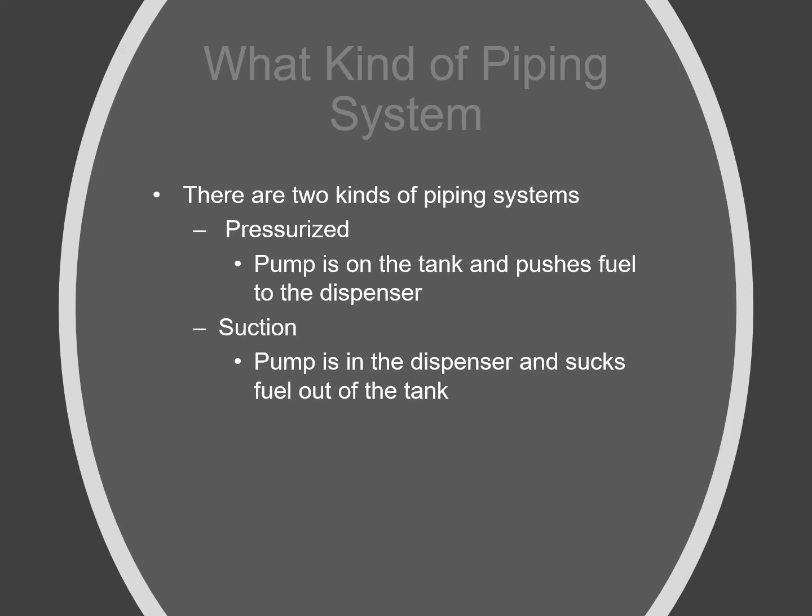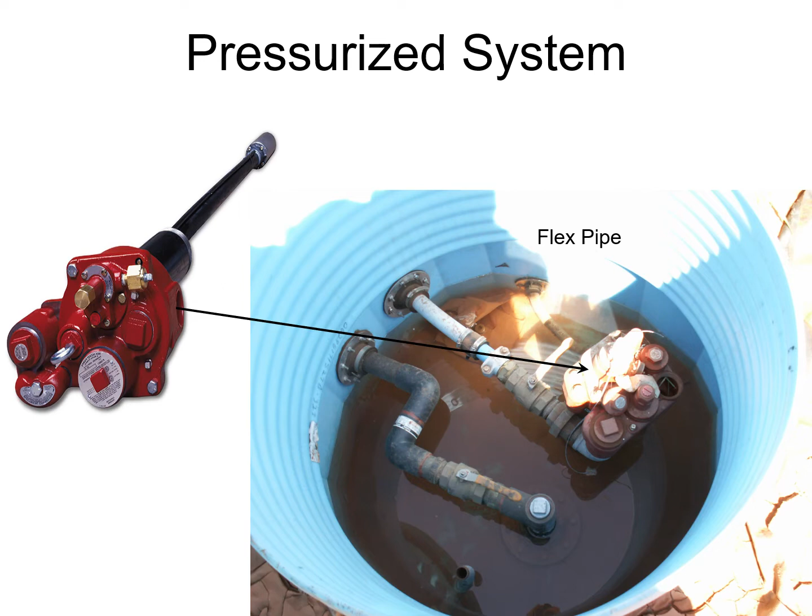That would be crazy. So what we talked about in 101 was the two types of piping systems, the pressurized and the suction system. And then when you're looking at a pressurized system, you're looking down into the sump, you can actually see the piping down there. And we'll talk about what kind of piping you see when you look in the sump in one of the other slides.

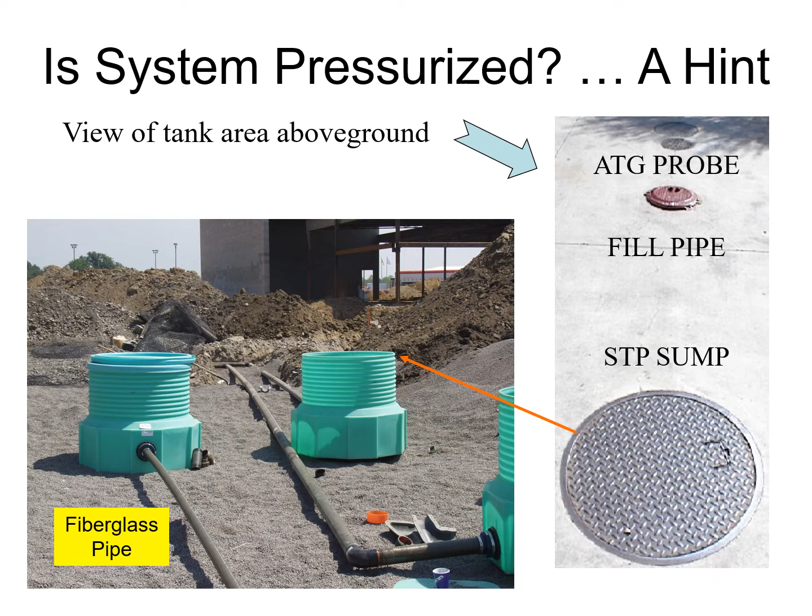Pressurized system, this is how you know it's a pressurized system. Usually you have a big STP sump, and then you can see the layout of the piping whenever they're installing the system on the ground. And these are fiberglass pipes in this system.

So piping in an underground storage tank system is very similar to the underground storage tanks. There's a primary pipe. In a single wall pipe, that's all you have is primary piping. That's it. So if there's a release, it goes straight to the environment.

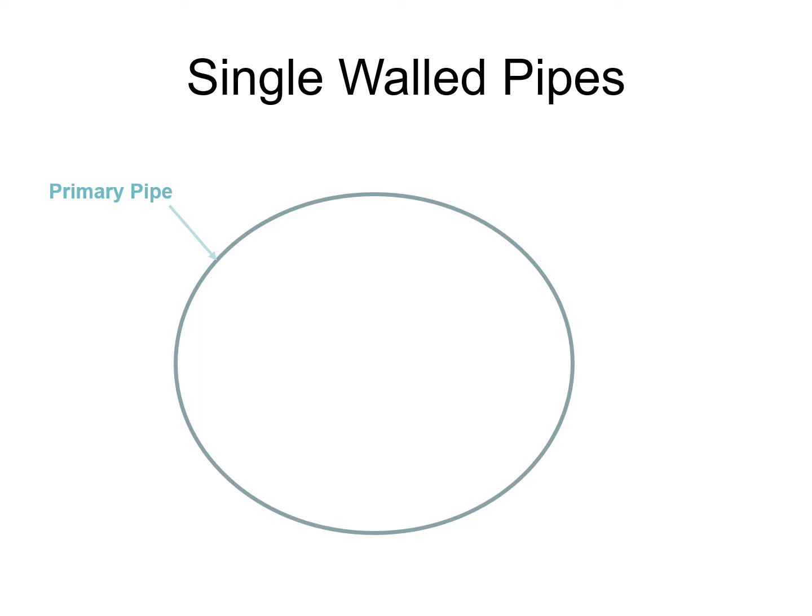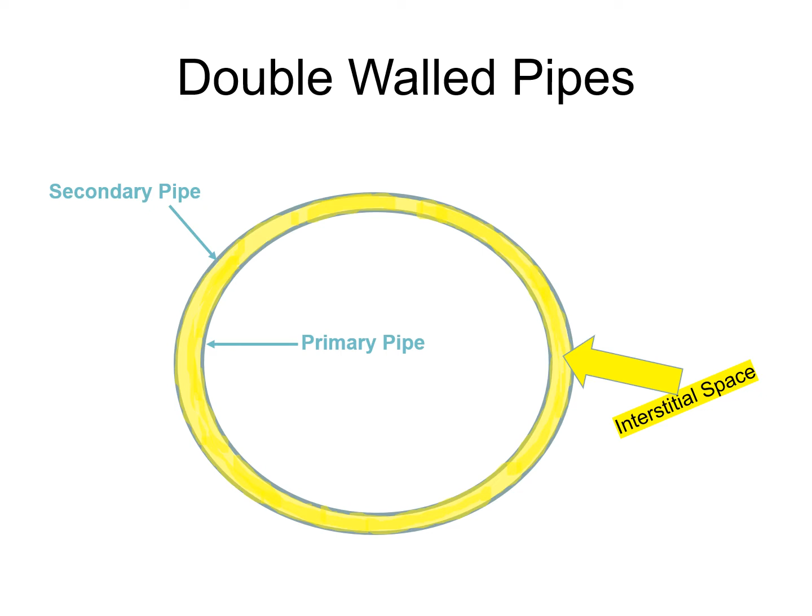In double wall pipes, you have a primary pipe and then you have a secondary pipe. So the pipe is considered to be secondarily contained. And in between the primary and secondary pipe, you have interstitial space, just like you do in a tank, but the difference is in how these are monitored.

Before 2015, any pipe could be single walled. So you could have any system with just single wall pipes. They could also be double walled. They could be more than double walled. They could be in piping runs, piping trenches. They could be buried in concrete culverts. There's all sorts of things that they could do with piping before 2015.

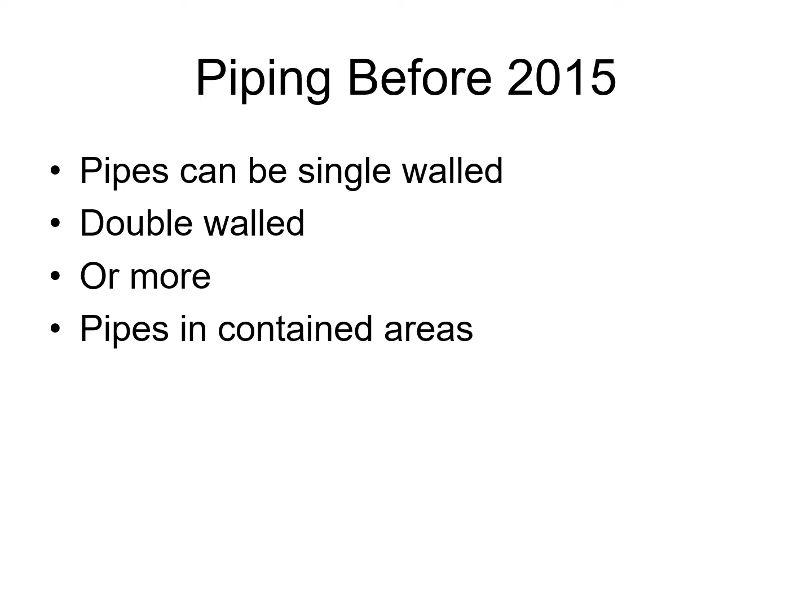Since 2015, pipes have to be double walled. They have to be non-corrodable, so that means that if they are in touch with soil or water, they won't rust. The ends of the pipe have to be open to the containment area, so they can be monitored continuously. The interstice, or the space between the two walls, has to be allowed to freely drain into the sumps.

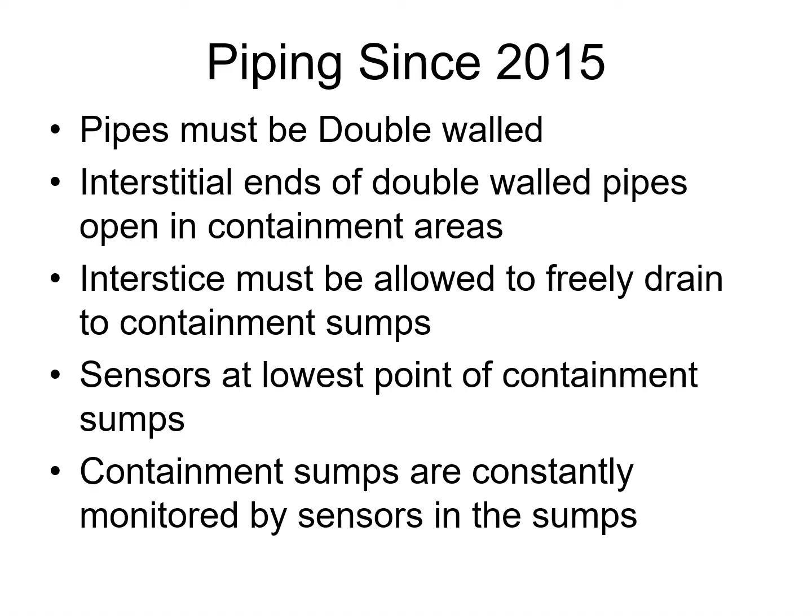You have to have sensors at the lowest point of your containment sumps so that whenever any liquid enters the sumps, it'll set off that sensor immediately. And then your containment sumps have to be monitored by sensors at all times. And those sensors have to be hooked up to some type of device to show if they go into alarm or not. Usually it's an automatic tank gauge.

So you don't want to put glue over the interstice. You don't want to leave the interstice open to the soil or the environment, because if you do, it can drain into the environment and it won't drain back to the sump and set off the alarms.

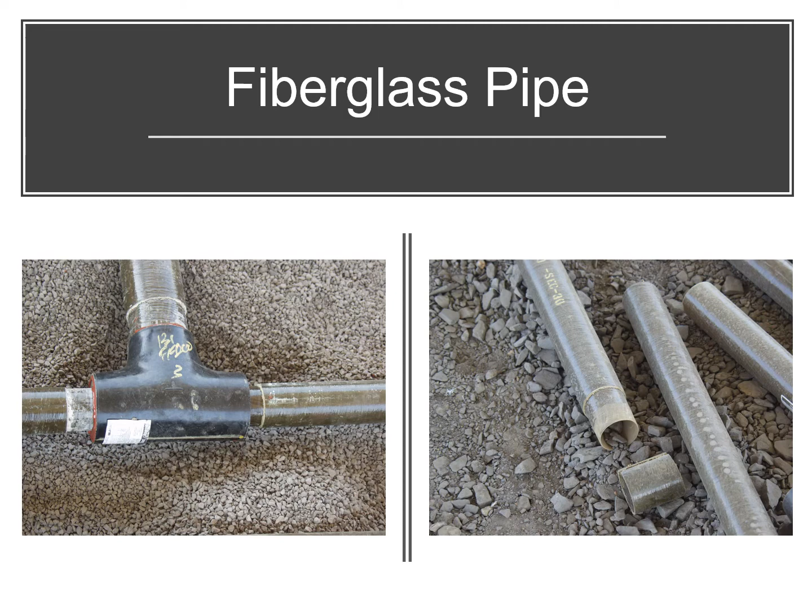So that's just a couple of tidbits about when you install fiberglass pipe. These are some different versions of flex piping. There are a lot of different types of flex piping out there.

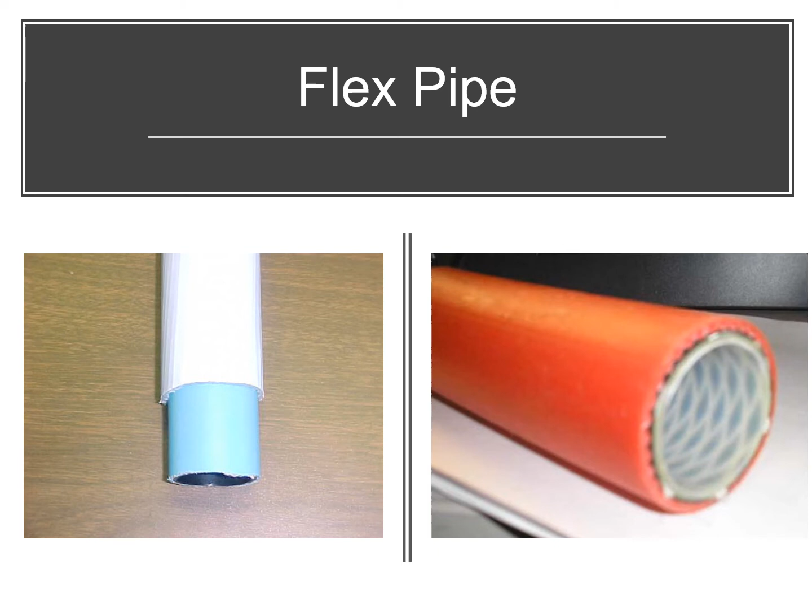We have had histories of some manufacturers of flex piping failing, and what will happen is this outer coat will move, either it'll expand and move down the piping and then cause the whole piping run to break. And if it breaks, of course, it's not going to work anymore. But what you typically have on these pipes is a primary inner pipe, a secondary outer pipe, and then a space between the two pipes where any kind of liquids can move back and forth through the system.

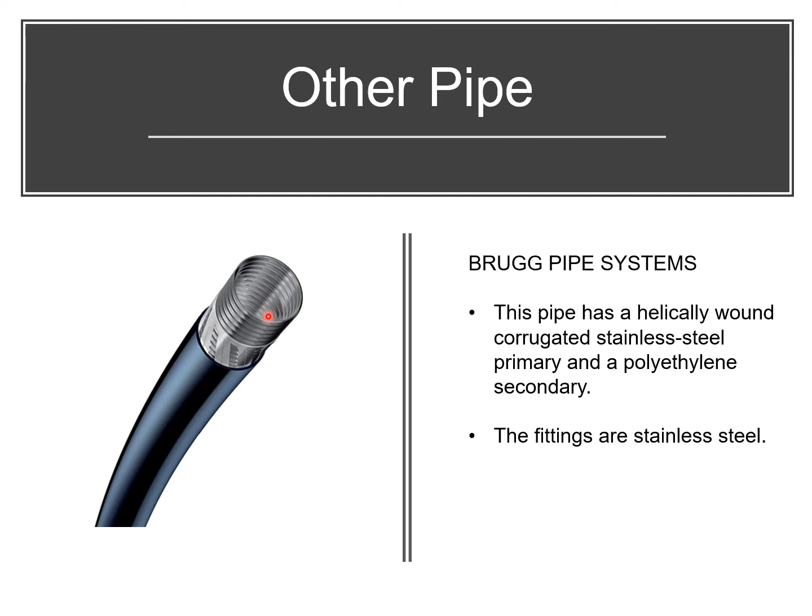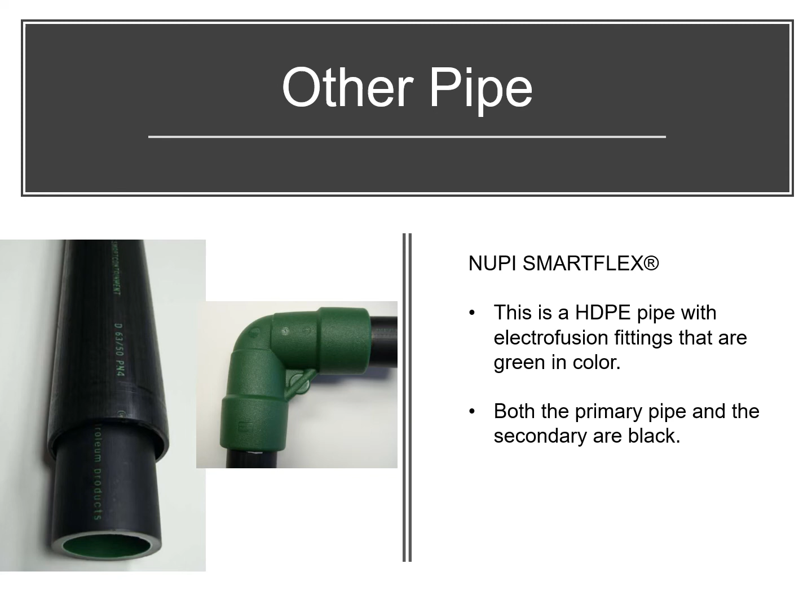There are other pipes out there that are basically flex pipe, but they use different materials on the primary piping. This particular brand uses stainless steel for their primary piping and a polyethylene for their secondary. This one uses HDPE pipe, high density pipe with electrofusion fittings. The fittings are green in color and the piping is usually black. I haven't seen any of this type of pipe in use, but I've read literature showing that it is out there.

One part of the flex piping that you'll see that often gets confused is what we call a chase pipe or a rock guard, and it's this corrugated pipe that runs the length of the piping run, but it is not designed to contain petroleum, so it is not a secondary or even a tertiary containment for these piping.

It is designed basically so that an installer or a contractor can come out, grab the end of this double wall pipe out of the chase pipe and pull it all the way out, and then pull a new pipe into that chase pipe and install it without ever breaking concrete. These are not used in fiberglass piping, but you'll see them all over whenever they're installing new runs of flex pipe.

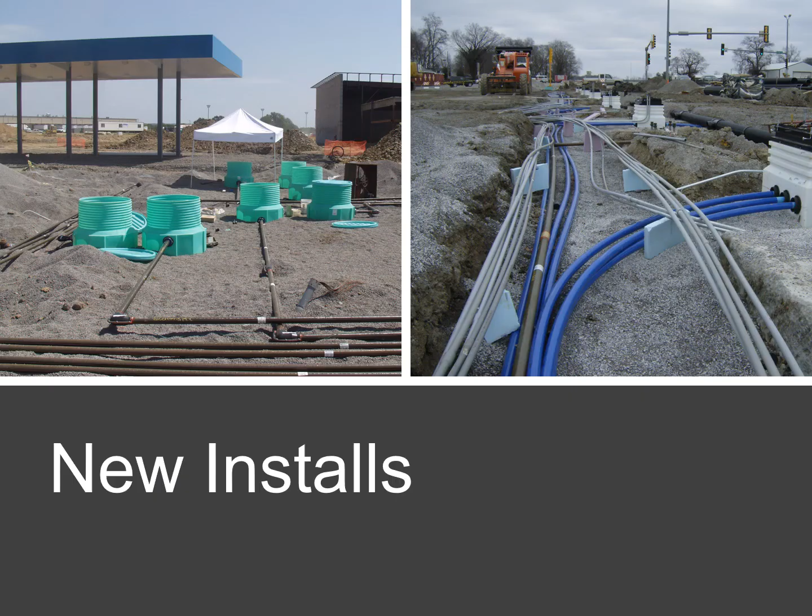Looking at the piping during the installation, you can see the flex piping on the right has really slight curves to it. They don't do 90-degree angles. This is because they use one run of pipe for each grade of fuel that they're running. So this one pipe right here will go all the way back to the tank, and it'll be just one solid run of piping. So they can't really put 90 degrees in this because of course it'll kink it.

Over here on the left you have your fiberglass pipe, and the fiberglass pipe has several clamshells because they have 90-degree connections in it. They have pipes that are connected together, so they have a clamshell there, and those keep the interstice consistent throughout the run of piping.

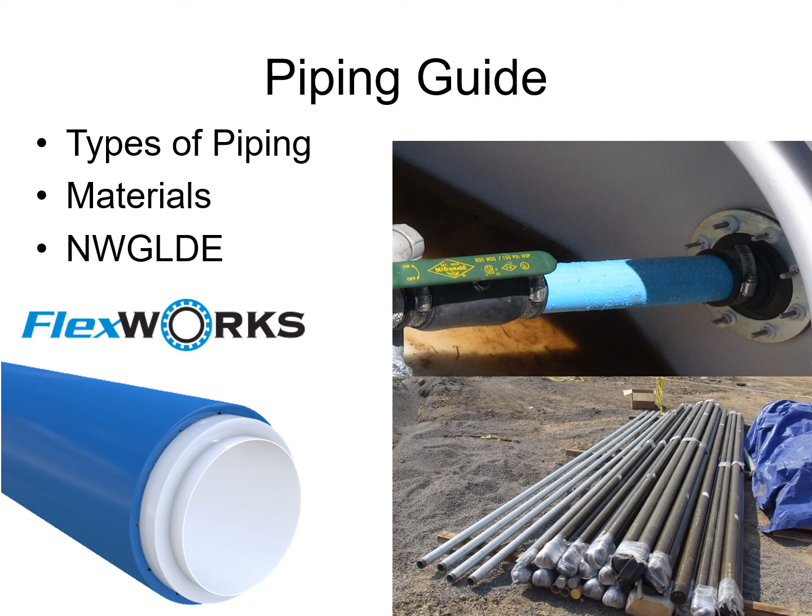In our next video for the underground storage tank compliance, we're going to talk about piping release detection. So that'll be piping 301.